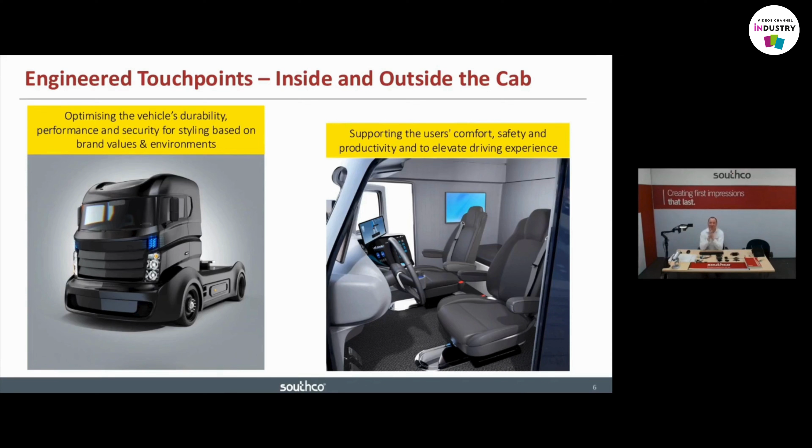Interior-wise, this is quite a broad subject, I think, for trucks. A truck is part office, part car, and part RV. It has to provide a lot of different functions to the users. What's nice is because we work in a large number of industries, we've got products from those exact industries that we can pull in and use in this application area.

Okay, so jump into the chassis and exterior. These are some of the products, and everything you see there you can see on Southco.com. Rotary latches, and I've got an example to show you on rotary latches: heavy duty steel products that keep doors closed. They can be operated directly or externally, remotely, if styling requires that. With the draw latches, the ability to pull two panels together, hold them tight and resist vibration. So we have a whole range of products for that.

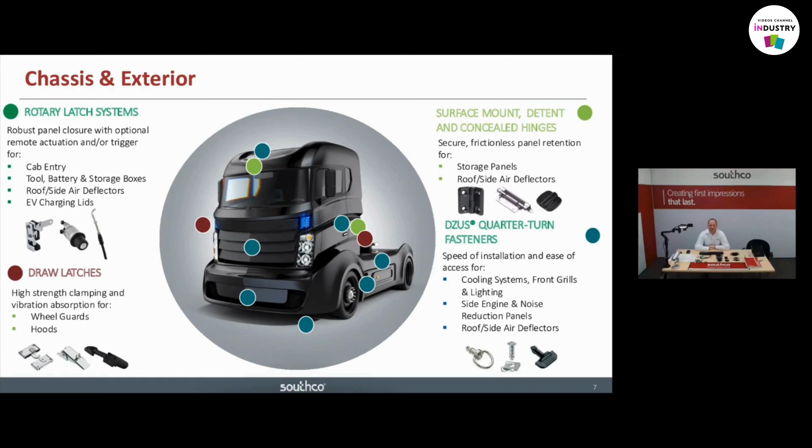I talked about hinges, so we've got surface mount, detent, and we've got an example of that to show in a moment, and also concealed. And then the Dzus quarter turn line, so quick access fasteners that we can use instead of traditional nuts and bolts and screws. That enables a person to get into a part and access and service it quickly.

So first example, rotary latches. I call them an R4 product line. We've got a number of these from different sizes that you can see across the top of the screen. And the particular application here was for toolboxes on a truck.

So we took one of those, and it was kind of a mid-size product, and then we set about customizing it to suit the needs of an OEM. They had ideas around how that needed to look, feel, and also how they needed to connect it to their additional systems. So we needed to modify it, take that standard product and convert it to something new. And that's exactly what we did. And we see the image on the lower part of the screen of the results of that.

So we see how it now mounts on the sides, has a longer trigger for the connection for cables to operate. Interestingly, you can perhaps see that it's reversed, and that is because this new latch is designed, it's not handed, it can be mounted on the left or the right of the vehicle.

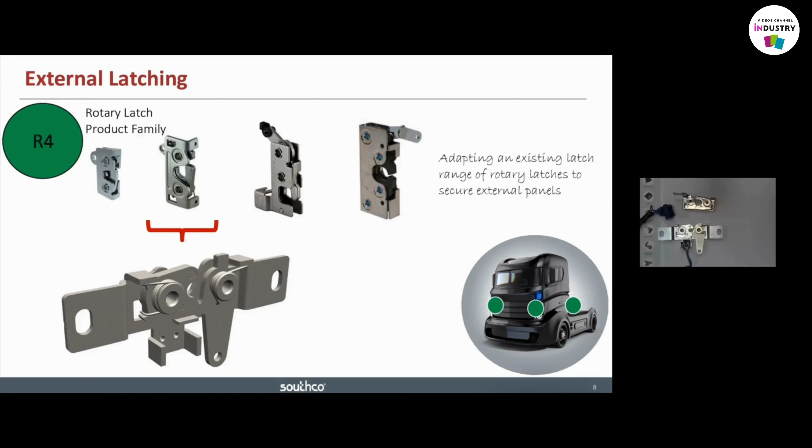So changing gears and looking at the interior of the vehicle, there's a whole number of different application zones, and I picked sort of three to focus on. Push to close and glove box latches. So anything that needs storage, any cupboards, any lockers, any compartments that need closing and retaining shut, we make latches for, and I'll show an example of those in a minute.

Then I'm introducing the word constant torque and counterbalance hinges. This is particular types of hinges that hold or position devices in a configuration. And a classic example of that could be a laptop hinge. You open the lid and it holds it wherever you wish to view the screen. And that's very much linked to the final, which is tilt monitor mount. So we see on that image there, there's at least two large monitors that perhaps need moving and positioning. And I'll share an example of products that we've created for that shortly.

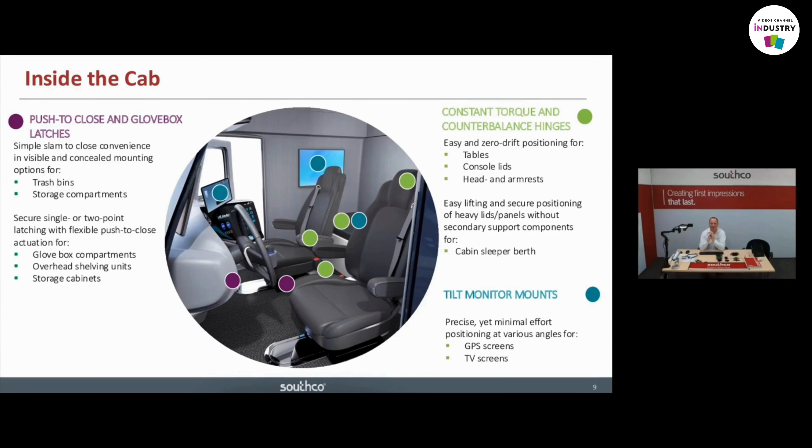So first one, storage latching. So this product here borrows heavily on our automotive work. We've created a lot of glove box latches for cars, and you see the image on the top in the middle. That is a rotary latch. Again, it's rotary like the previous one, but this is all plastic, and it's slightly lighter duty and intended for internal use. And then the two below it, they're offsprings of that, used and created for the truck industry. So again, taking that existing theme and building on it.

The one on the left shows a slightly curved paddle or handle. What we often do is work with truck OEMs and tier suppliers, and we need to style our products to meet the styling requirements of the vehicle. And that's a classic example. We took the existing rather square-looking product and we restyled that paddle to make it fit in with that application environment. The one on the right with the sort of orangey coloured paddle, it looks kind of drastically different.

However, the layout is very different, but the operating principles of it are the same. You can see that it's also inherited a lock to secure the storage compartment. We make a lot of locks, so we're able to combine two existing products and put those together. If I just put those into view on the camera,

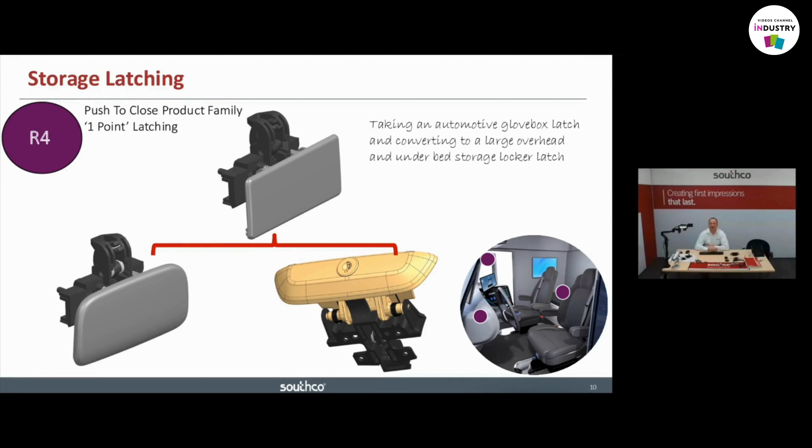Moving on to its closely related product, 2-point latch. Again, a product we've borrowed from the automotive industry. 2-point latches are very common in car glove boxes. You see those on the top middle. We then recreated an existing platform into one for an overhead storage bin, and you see that in the center.

Interestingly, working with the truck area OEM, we're able to rationalize the designs and get the number of configurations down to one. So there's typically 3 overhead storage bins. Initially, they were all different sizes and requiring different latches. After a bit of design iterations, we're able to standardize on one latch that could be used in the 3 locations. And that was the end result. And just putting those into view on the camera.

The first examples I'm showing are just what we call the Southco standard coupler unit. It's a coupling gearbox that enables you to connect 2 latching rods to one system and to be used together to secure. So building on that existing theme, we then created this new product which integrates the paddle and handle and lock plug within it.

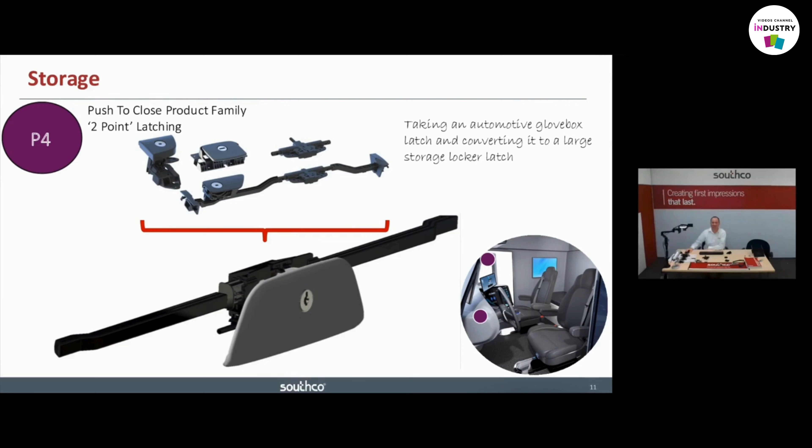Okay, we see the original hinge, and then we see its customized or modified version. Looking at side profile, you may just be able to see that it detents, clicks in position as it opens, and this does exactly the same. You see slightly other changes. We've got an exposed end. It's simplified slightly because in the application it's covered, you can't see it, so it doesn't need to be, let's say, aesthetically pleasing in its own state. So that holds the storage bin open.

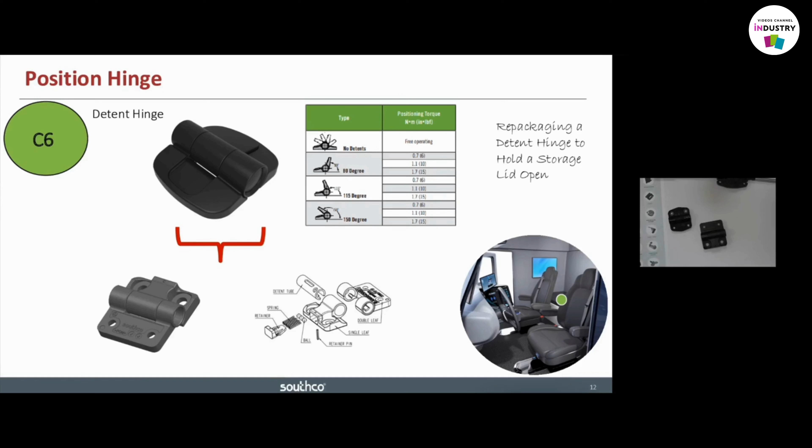And just moving on to the last example I wanted to share with you today. This is introducing position control as a subject. I mentioned laptop hinges, that's the classic example, but we have a large range of hinges that position or apply a torque to the lid. It's a big range, but what's nice is each particular product has a whole number of variants configurable based on torques, based on reverse or asymmetric values. So we can take those hinges and use them and dial in to what's needed in the application.

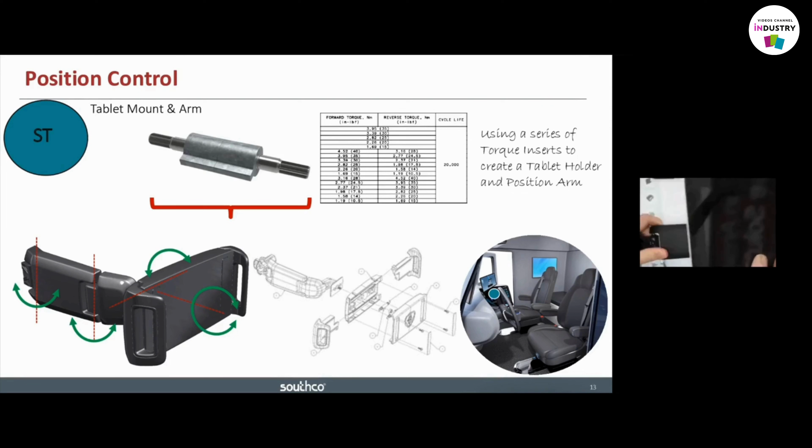So when I look at the difference, we look at the tablet holder in position, and we can just about see the arm and the different joints, and how that product fits into those. So each of those joints moves, it positions, it holds where it's left, it rotates even, to create that complete assembly.

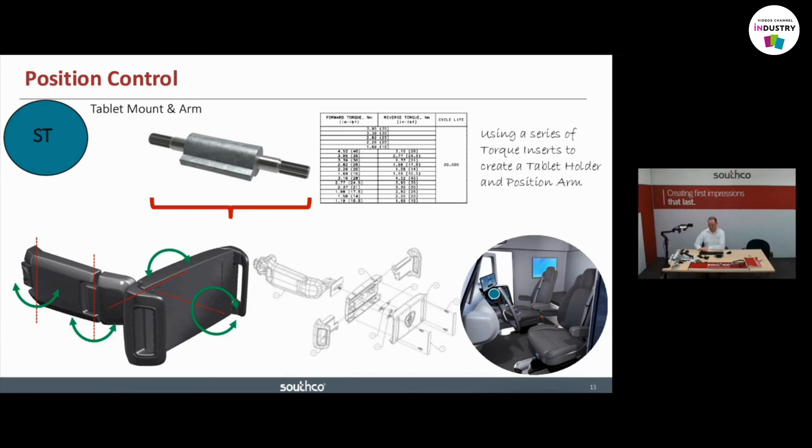And with that, that concludes my examples, but I included these images here just to show what could be next. Interestingly, when we just looked at the tablet holder, I think if we'd looked at this presentation perhaps 10 years ago, we probably wouldn't have been talking about tablet holders, because at that point we didn't realise they were a thing or even that we needed them.

So I'm not going to predict what another 10 years is going to bring, or what devices we could need then. But what I would say is all the products I've shown you today have an electrical equivalent, and some of those are shown on screen. When I say electrical equivalent, that could be electrical actuation, electrical movement, or maybe electrical locking or isolation. And those products exist today. We're continuing to work on them and create more, and also to link them to apps and other control systems.

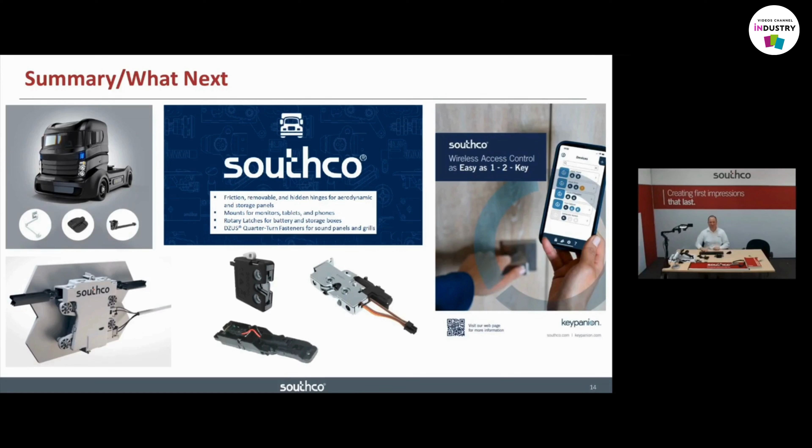And I think the advantages with electric, as well as near silent operation, is you can control how they're used and when they're used. So the ability to perhaps isolate a compartment or door when a truck's in movement can be done electrically, or to control who's opened it, when they can open it and who's authorized to do that is another very easy thing that can be done electrically that is a lot harder to do mechanically. So I see great potential for products such as those. And that really concludes my presentation.